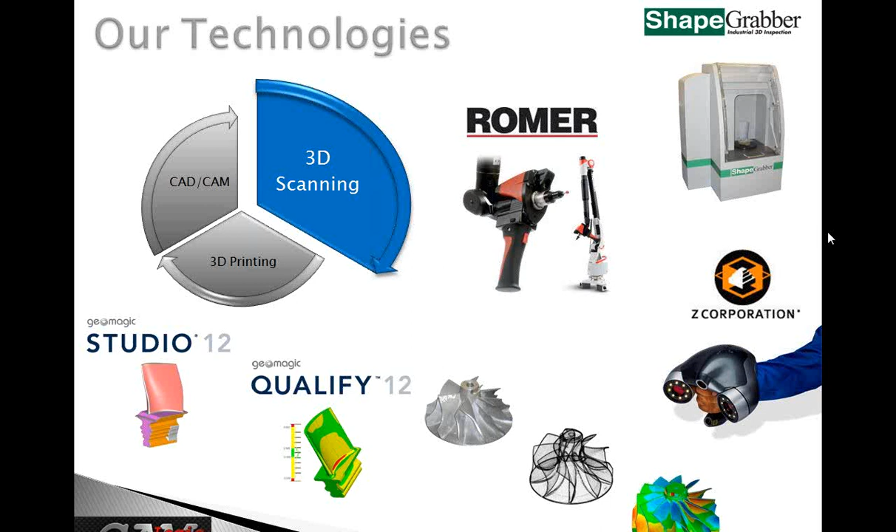So this week we're going to talk about Solid Edge surfacing, and again this is part 2. Just in general, Solid Edge surfacing is best used sketch based, so you're drawing profiles as to what you want. Free-form modeling. If you're going out there and you say, I need something that looks kind of, sort of, something like this, well, that's a good time to use surfacing.

Also non-planar, non-analytical. When you want to go out there and say, I've got this piece and it's going to twist and it's going to curve halfway around and then go straight and then go to a point, things like that, it's a great time to use surfacing. And then also to repair and enhance imported models.

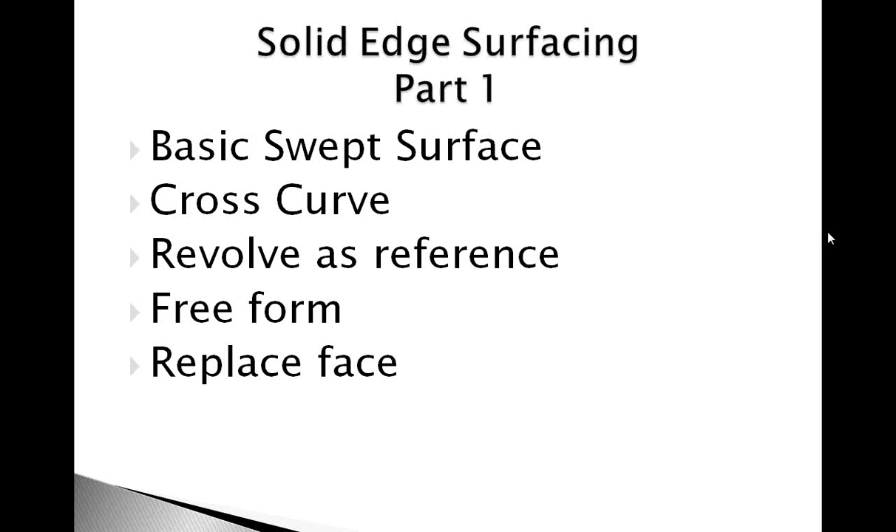Last time we talked about this, and this again is out on YouTube. We did a basic swept surface, cross curve, revolve as a reference. We did a tire. We were making a fender, so in order to see what size of fender I needed, I used surfacing to make a tire very quickly, just so we could work around that. Free form, and then replace face.

In this session, we're going to look at BlueSurf, bounded surface, wrap sketch, and project to sketch, or project sketch. So let's go ahead and start with our project sketch.

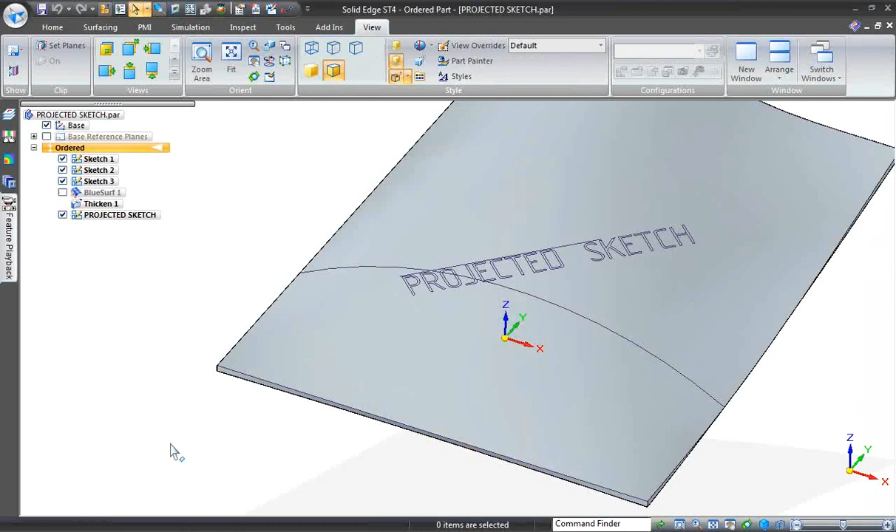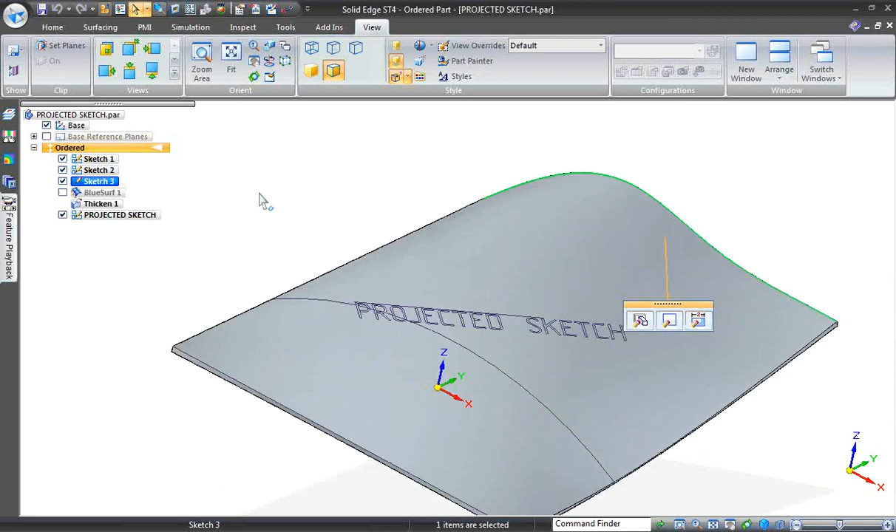I'm in my Solid Edge part, and I've got a fairly complex shape that I created, and it started from this straight sketch, went to the curve sketch, and then went to this free-form curve, if you will, and I used BlueSurf to tie that all the way in there. You can see that BlueSurf went across there.

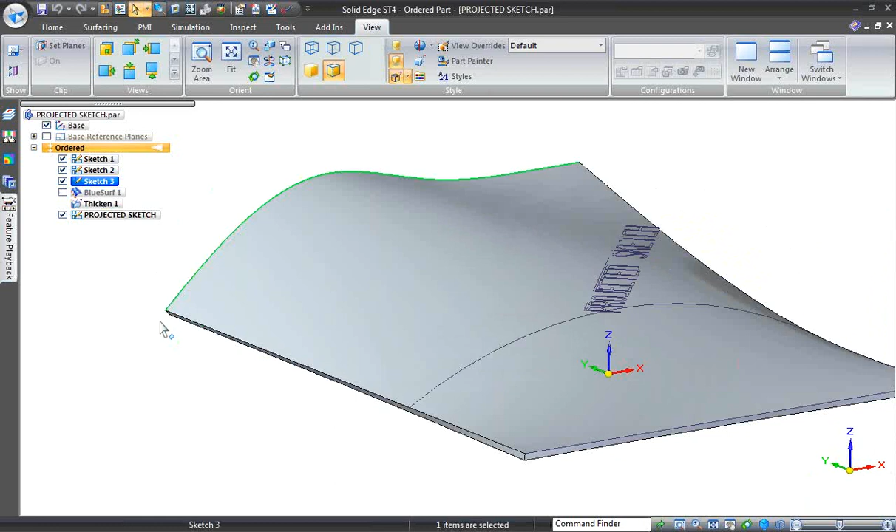Then I used a tool called thicken, and we'll see this later on, that allowed me to take that complex shape and give it an actual thickness, and then it became a part. So today we're going to learn about projected sketch. I want to take this projected sketch, and this sketch right out here is nothing more than some text. We'll come over here.

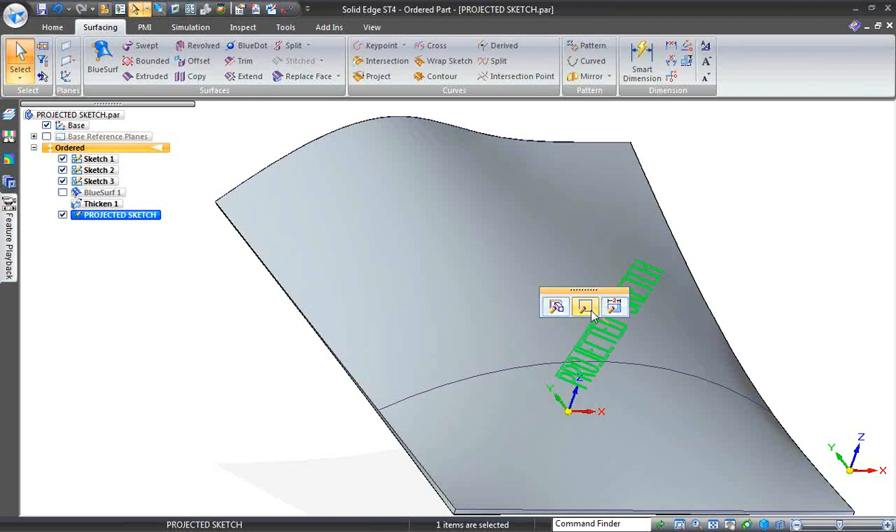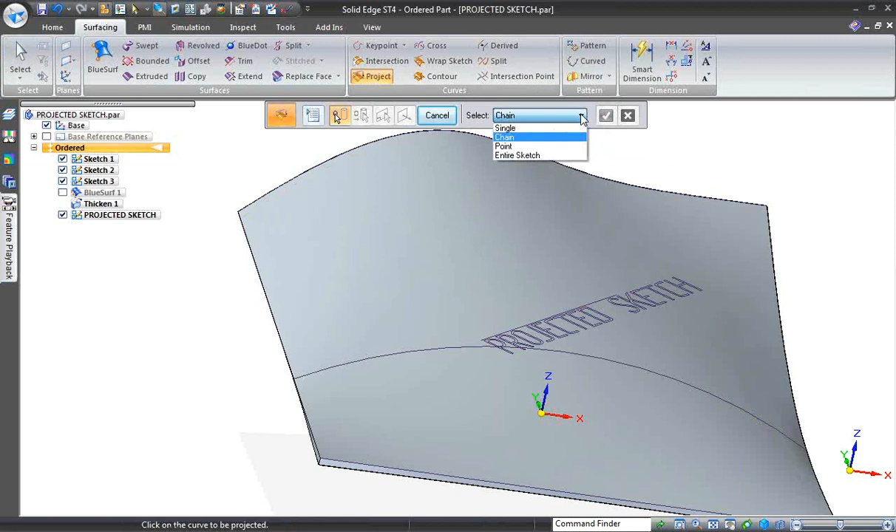This projected sketch is nothing more than a set of text called projected sketch. You can have anything that you like, but it's sitting out on a plane, on a regular flat plane. And I want to go ahead and use surfacing now to project that sketch. So the first thing I want to do is pick on the entire sketch there.

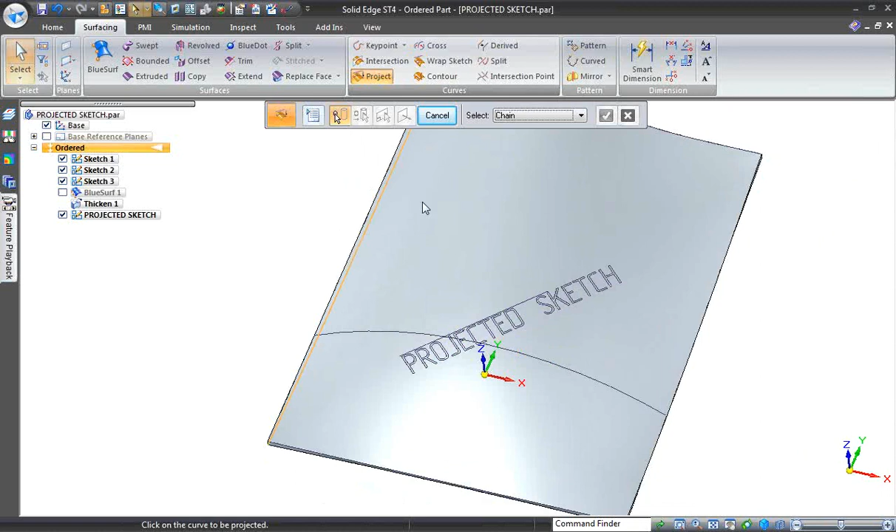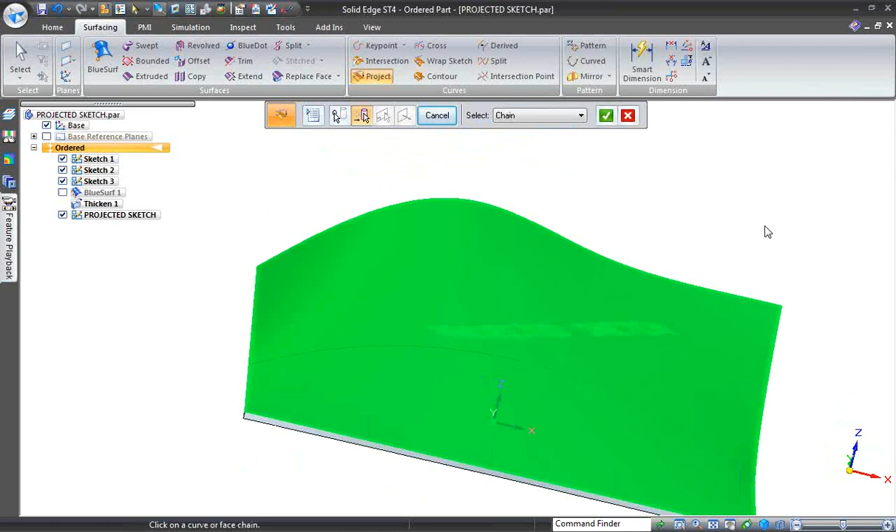I might just do it single. Bear with me 2 seconds here. So we'll go ahead and project that sketch, and just take it right like that. And I'm going to take out that line, I don't need that. And then I'm going to pick on the face that we're going to project to. And now I'm going to tell it to project down.

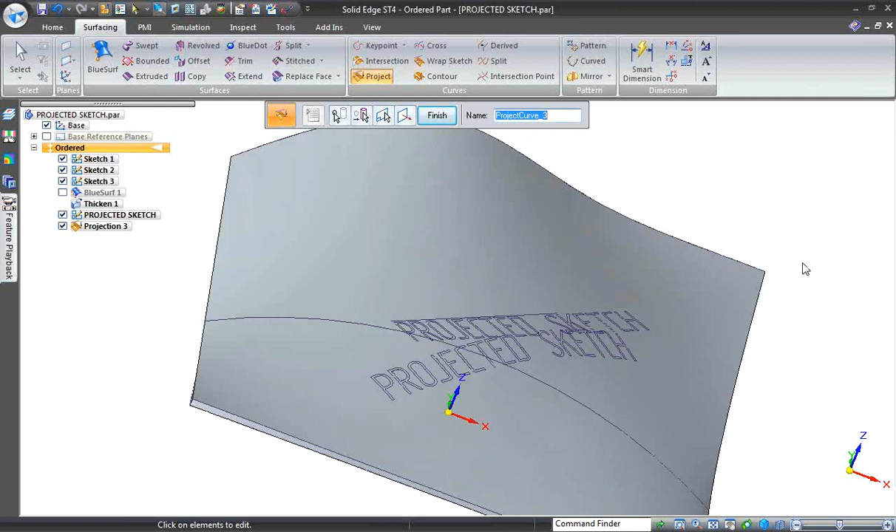So now I've got projected sketch. This, almost as if you will, this was on this sketch. The text right out here was on a piece of glass. And if you think about it, we shot a spotlight through there, and that shadow of that sketch went right down onto there. So we have our projected sketch,

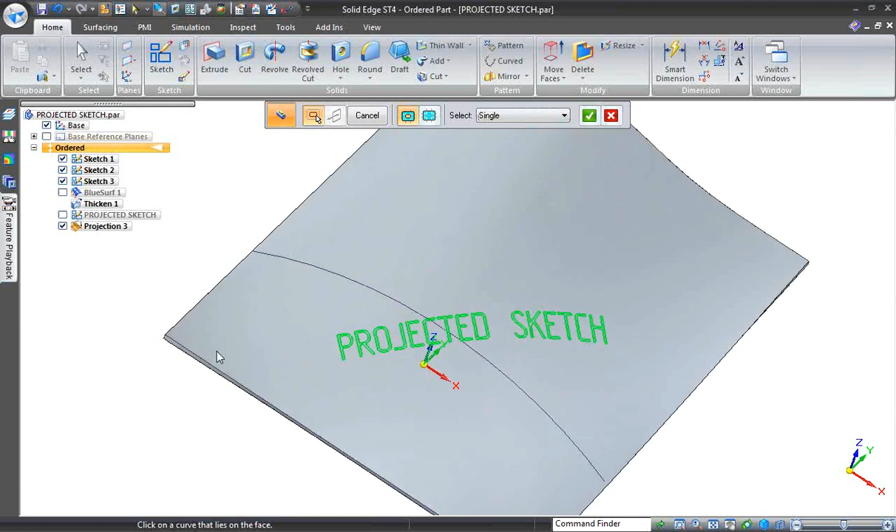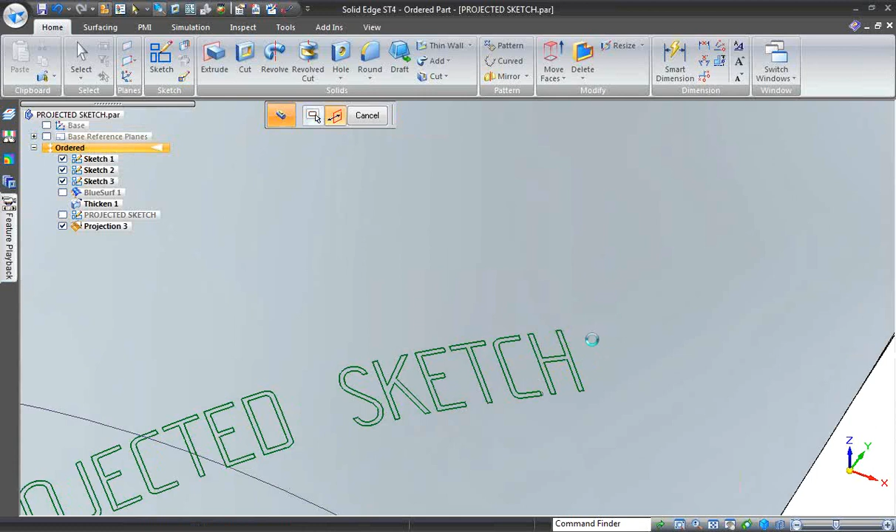and in this case, we'll go out and we'll add a normal protrusion, if you will, to this. Go in and then come up. In this case, we went up 20 thousandths.

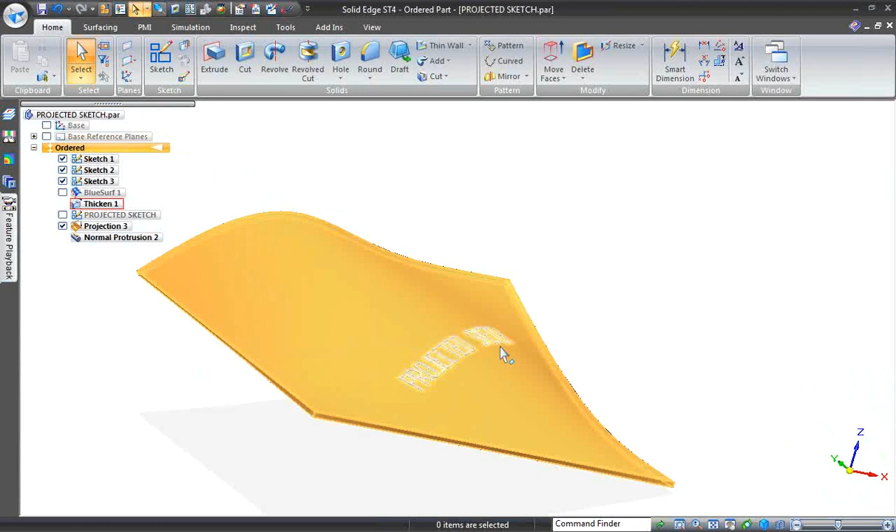Okay. So I've got a projected, roll over this way. I've got a projected sketch that I came from up top of a flat plane, shot it down, and projected it on there, and then now I can go ahead and bring that up. And that can be with text, that can be with bosses or bumps or holes or any offset that you want, or even cuts. Cuts can go through there and do the same thing. So that was a projected sketch.

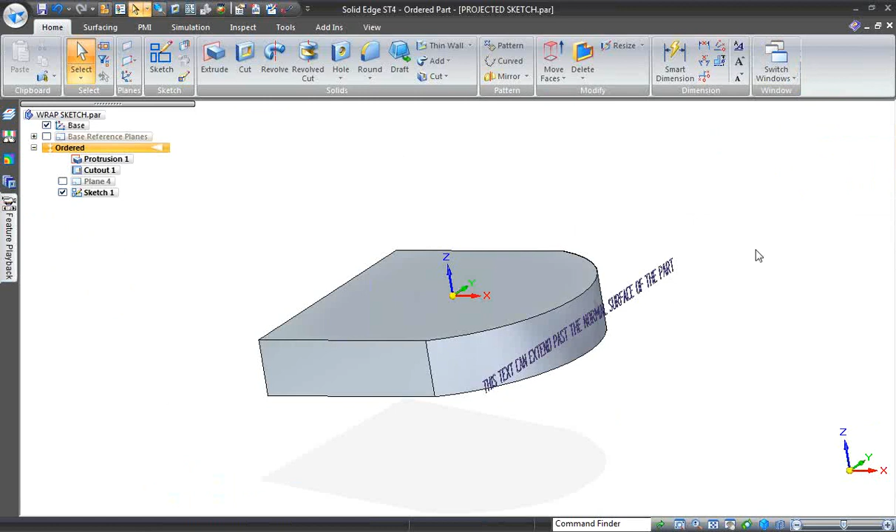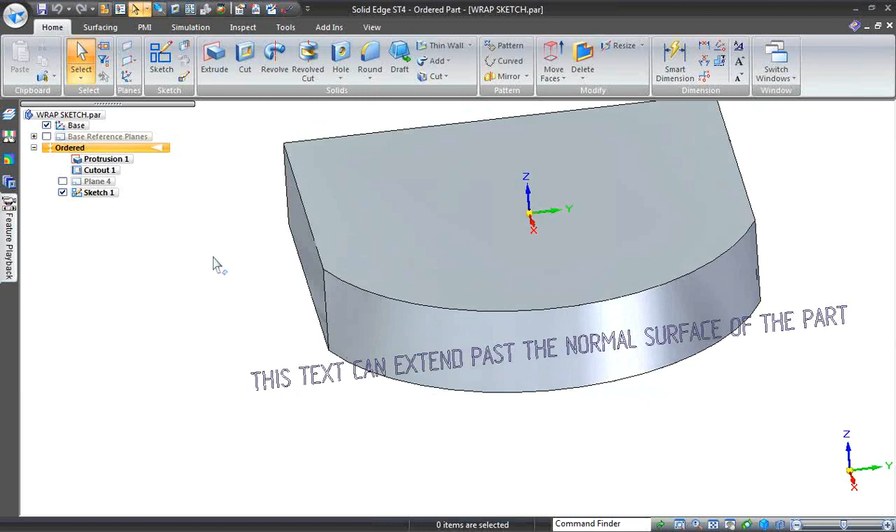Now I want to go over to a wrap sketch. A wrap sketch is just basically, think of a label. And as the part says, this text can extend past the normal surface of the part. So we're just laying this out, think of a piece of tape, think of a label that we would peel off and stick. And we'll just simply go to our surfacing at this point, and we'll just go ahead and wrap this sketch.

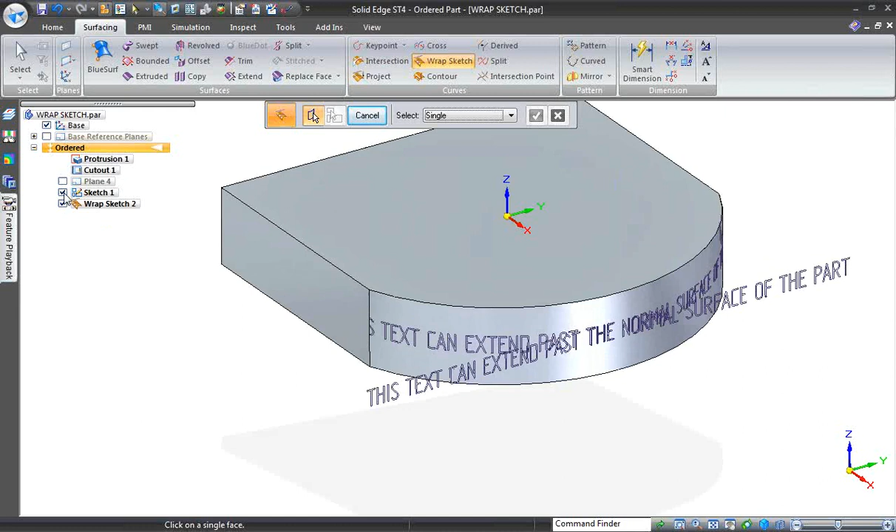And I'm going to take just this face right here, and then take and finish that. Okay? So now, again, we can cut, we can do anything that we like. I want to take that off, and you can see that it's just like a piece of tape. And you can see that this text does extend past the normal surface of that part.

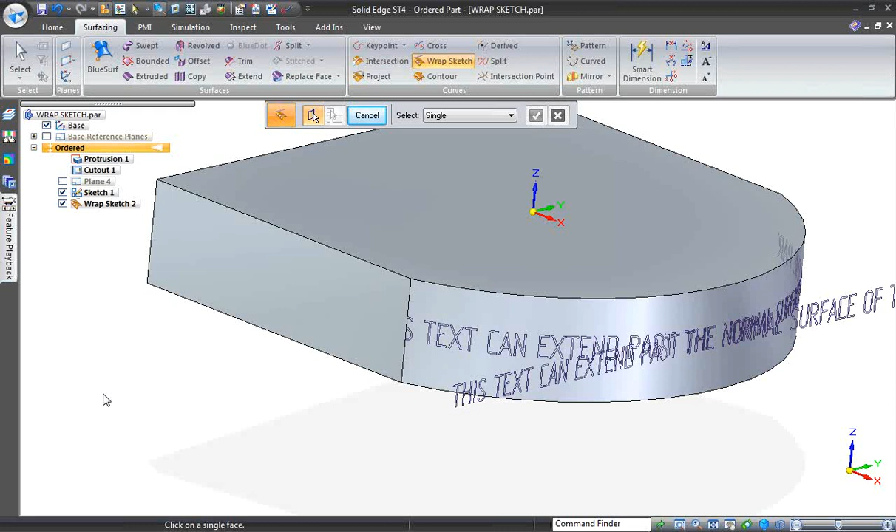So I can just make that label as big as I like, small as I like, and I'm just laying that around there. In this case, we would make the part wider to accommodate that whole label, if you will. But that is a wrap sketch. A wrap sketch is basically, if you think of a sticker or something like that, where you're taking a specified piece and wrapping it around the surface. And again, it can be bigger than the surface. It can do whatever we need it to be. But if you think of a label or a sticker, that's what a wrap sketch is.

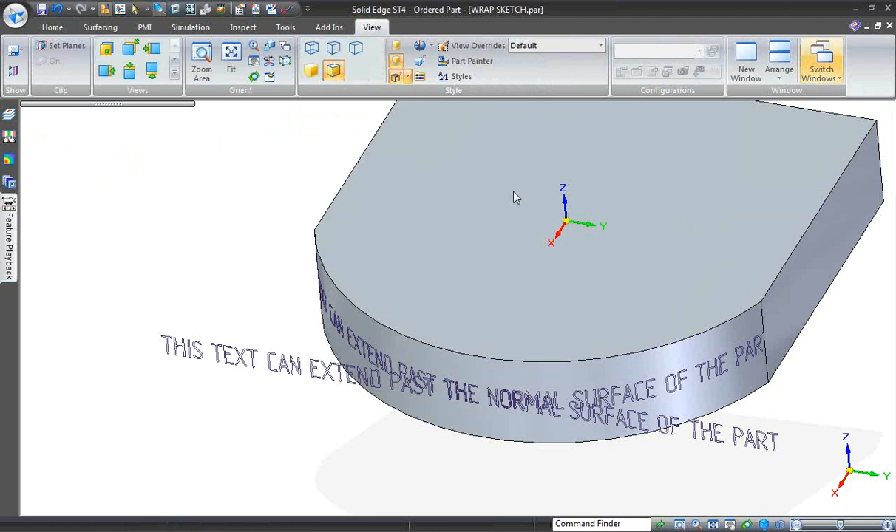So let's switch over to a bounded surface. Now, a bounded surface allows me to repair things that are missing. In this example, I'm going to go to my surface and I'm going to copy a surface. Now, when I copy a surface inside of surfacing, I can have the ability to remove internal boundaries. So let's say if I were to click on here and remove internal boundaries, it would

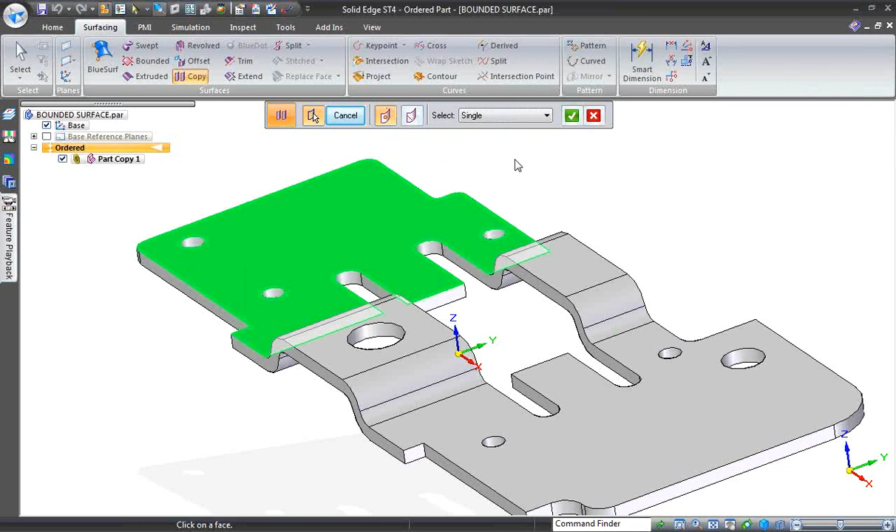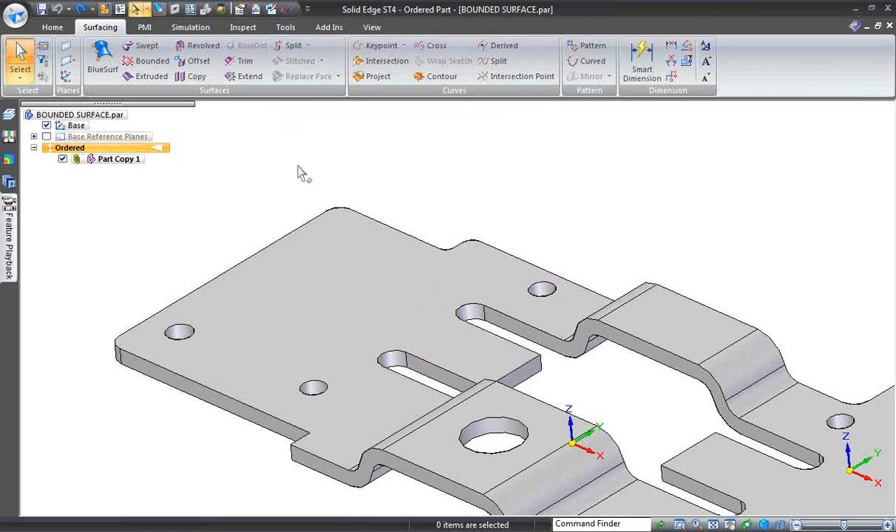automatically plug those holes. Die makers and tooling makers, you understand the power of that, because I want to make a tool that fits the surface of that, not necessarily fills in through the holes. So copy a surface is a very strong tool, but what I'm going to do in this case is I'm going to not fill in those internal boundaries.

I'm just going to keep the internal boundaries that I have. So for instance, I may want to make tooling that fills in everything but this one hole right here. So I'm going to go to bounded surface, and this is the same in repairing something. If you've got a bunch of sheets that are coming together and there's an extra tear or a shape that is missing right there, as long as that's closed in, I can go to bounded surface and just click and bound over that surface.

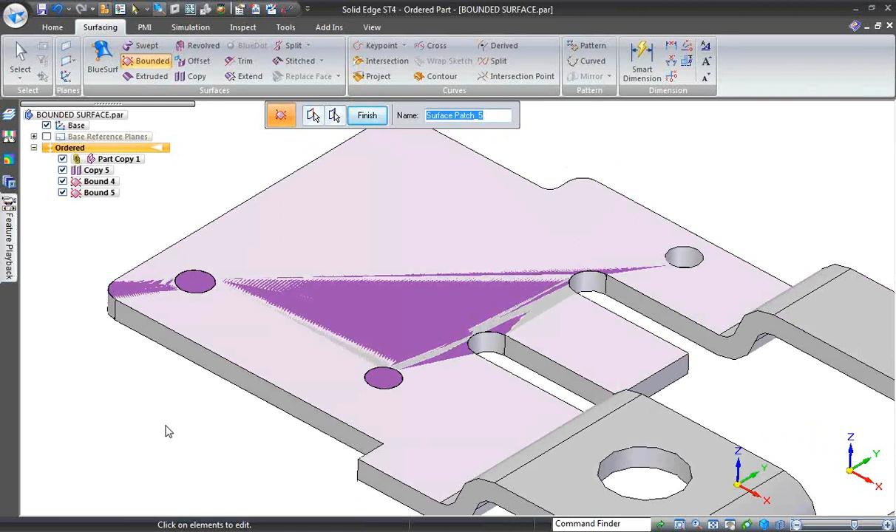I'll do it again. I'll take this one, and it's enclosed. Right click to accept, to preview, and then I can bound over that surface. So in other words, I'm taking all of this surface. I didn't want to close in all of the holes, so I chose not to close in those holes, but I have bounded in the surfaces that I want.

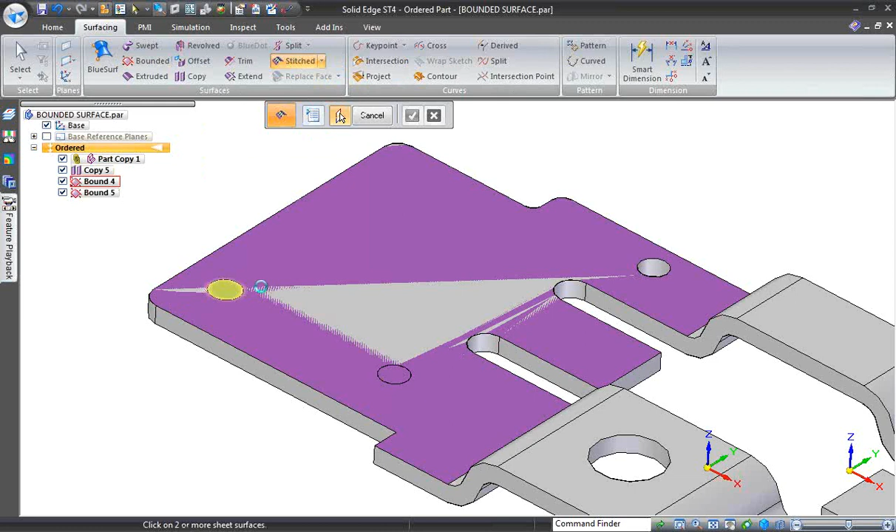Now, in this case, I can also go ahead and stitch the surfaces. So I can take these, these are now multiple surfaces, these three, and it will actually stitch that together as one unit. Okay, those are my choices, and that's bounded surface.

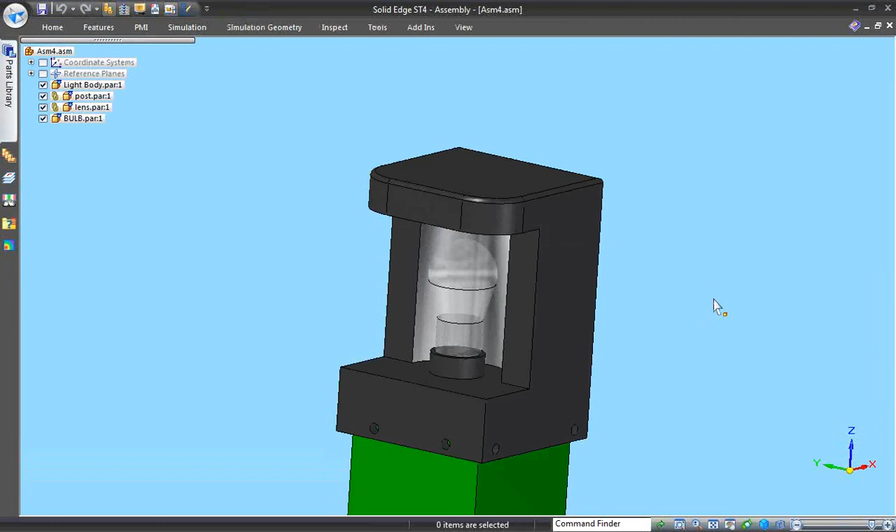Now, I want to switch over to probably the cool portion of this presentation, and that is a little bit of BlueSurf. And we'll even do some photo rendering at the end too, because I think this is cool. This is a light post that sits on top of a post, and it's a cap. We've got some screws over here. You can tell what kind of project I was thinking of when I wanted to build something like this.

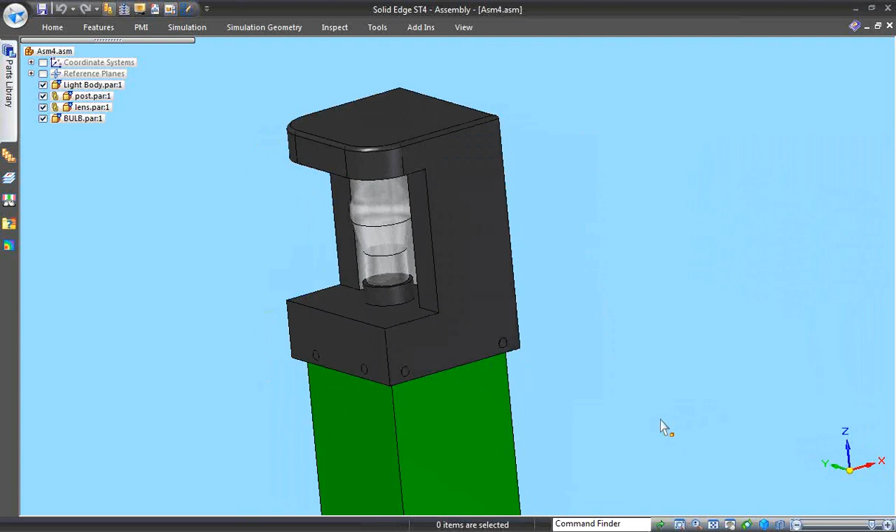So this just sits on top of a post, and here's the light and a light bulb, but we want to go make a shade for that. So I want to start over and start working in this part. Now, just for the sake of time, I've gone ahead and inserted that light unit as an inter-part copy, and I've also started one sketch down there at the bottom. Now, as we said, surfacing is sketch based, so I'm going to start a new sketch out here.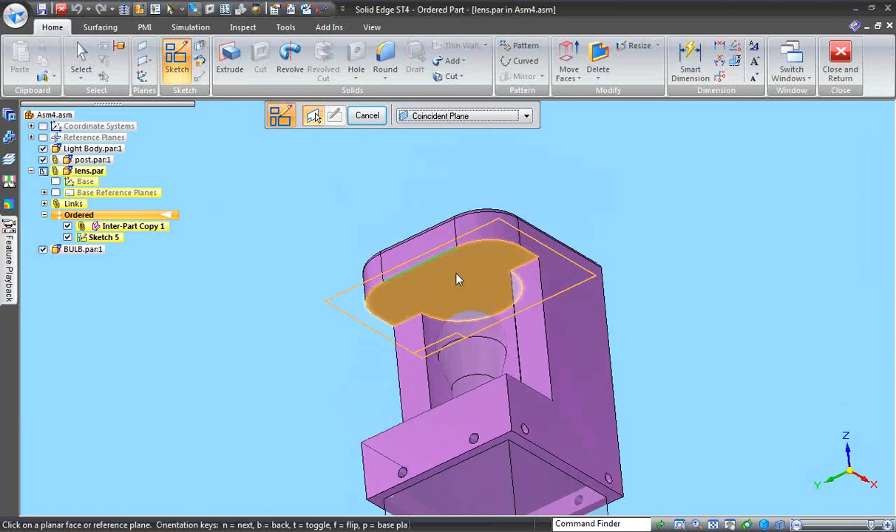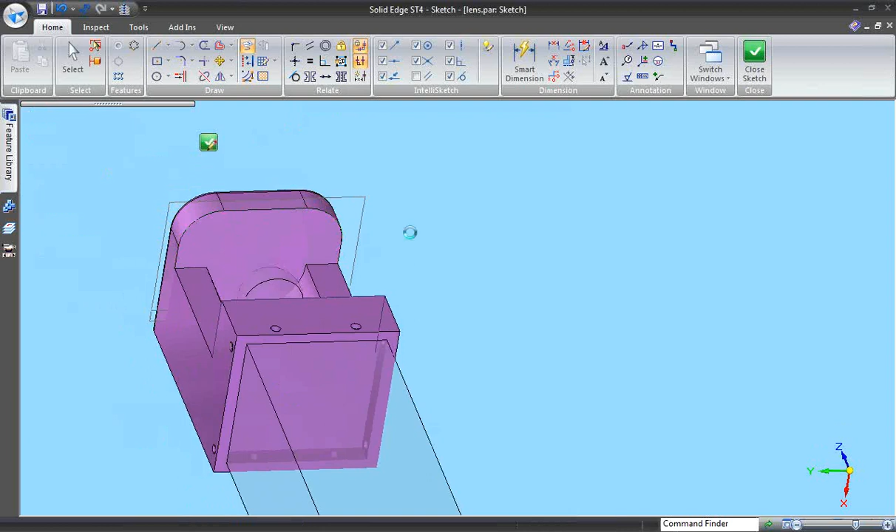And I'm just going to tip, and what I want is to include these edges. So in other words, I'm choosing a start and a stop point for my lens. So here would be my starting point. Here would be my stopping point up top where I wanted to go through.

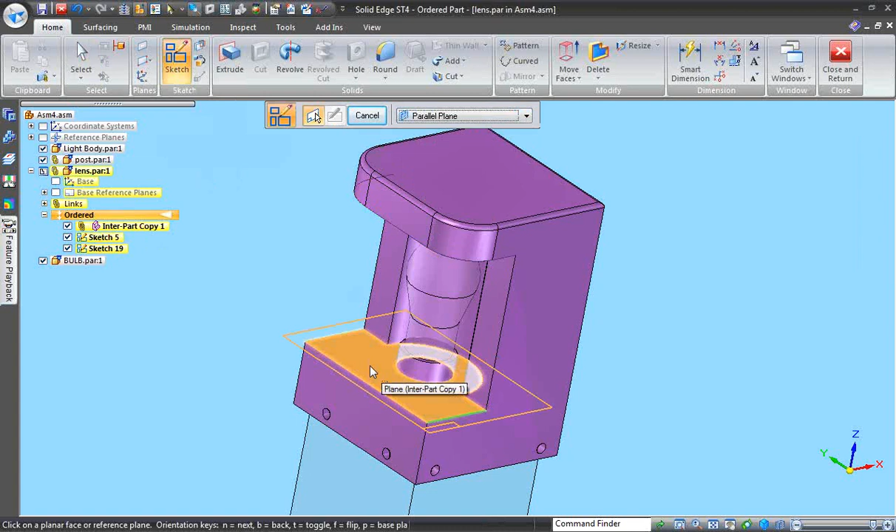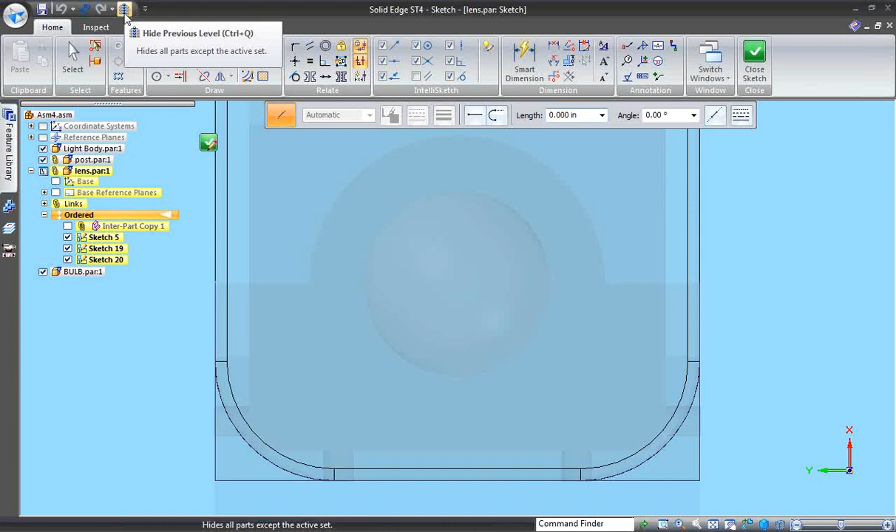Now the next thing I'm going to do is make a sketch out on a parallel plane. And we'll come around here. Just set this around. Now we'll come around here to the middle point of this opening. Now, at this point, I don't need to see anything else, because what I want to do here is go and create an arc by 3 points.

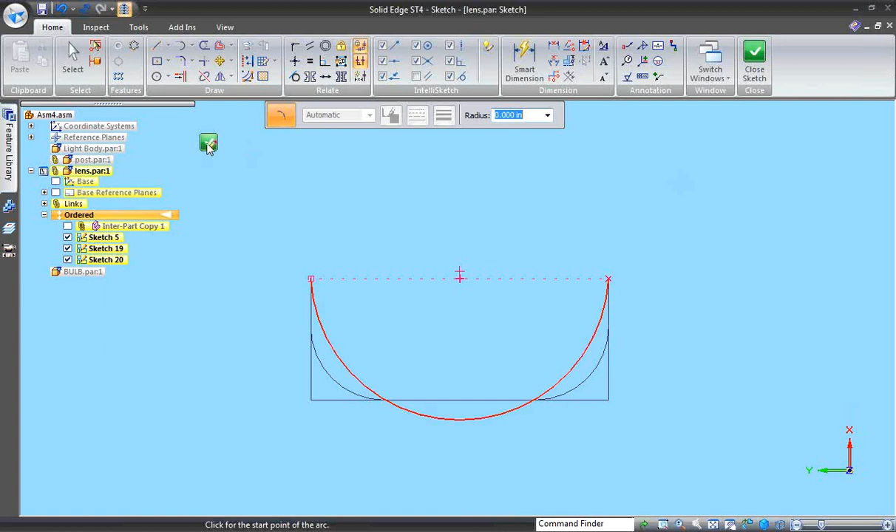And then really all I want to do is just say, yeah, we know the lens has to end back there, but we want to add a little bit of artistic flair to the part. So we want it to come square down at the bottom, round at the top, and then in the middle we want it to come out a little bit. So we want to get fancy, as it were, when we do this.

Now, to that, I'm going to add another sketch on a parallel plane. And I'm going to come from here, and I'll take it to the midpoint. Now, to there, what I'd like to do is create a curve. And a curve, you can think of it any way that you like. I like to think of it as a rubber band. You can stretch it, you can move it, you can do anything you like to it.

One of the nice things about this curve is that it does have specified points. So I can take these 2 points and I can make sure that the inside curve is going to be the same on both.

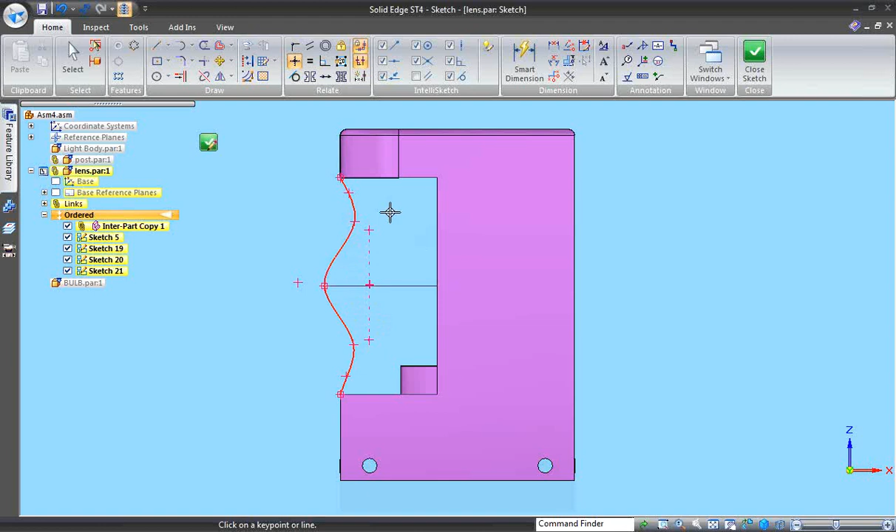So even though it's a freehand, free form type thing, I can add constraints, and I can also dimension as well. But I can add constraints, and I can work with that. So I have this. I really don't need anything else at this point to start my work. I don't need any other part. So I'm going to start with BlueSurf.

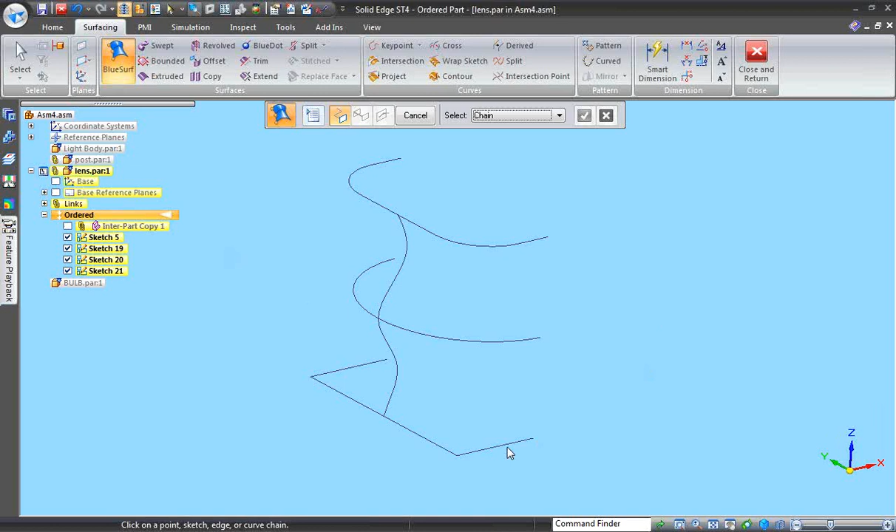Now, BlueSurf is much like taking saran wrap, cellophane, if you will, and just stretching it over certain areas. So I'm going to take and go from one area to another, and Solid Edge is just going to shoot this very, very fine, very, very thin piece of material, surface, right over there.

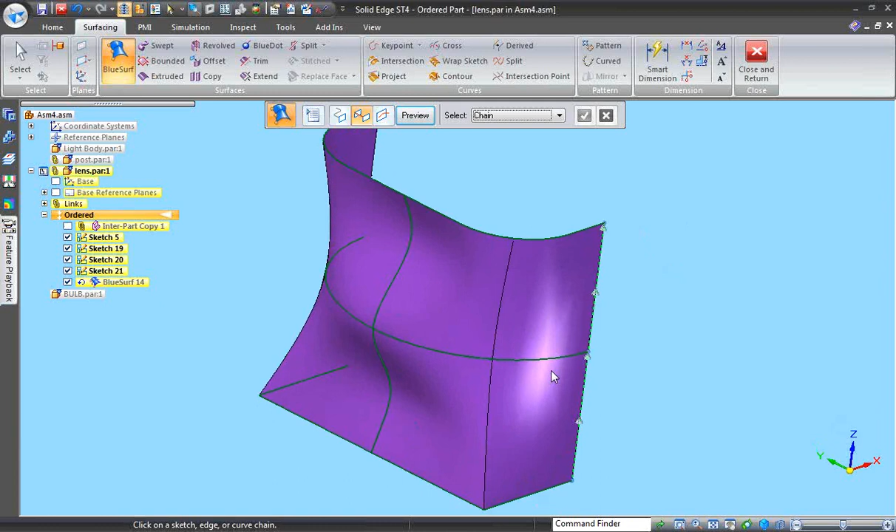So I've got my part, but right now it's going from cross-section to cross-section to cross-section. And that's fine, but what I want to do is insert a guide curve, and I want to follow that guide curve. And if you'll see, it'll actually bow in and follow this guide curve now. So it is going from cross-section to cross-section to cross-section, but it is also following this curve that I have set up over here. So have something like that.

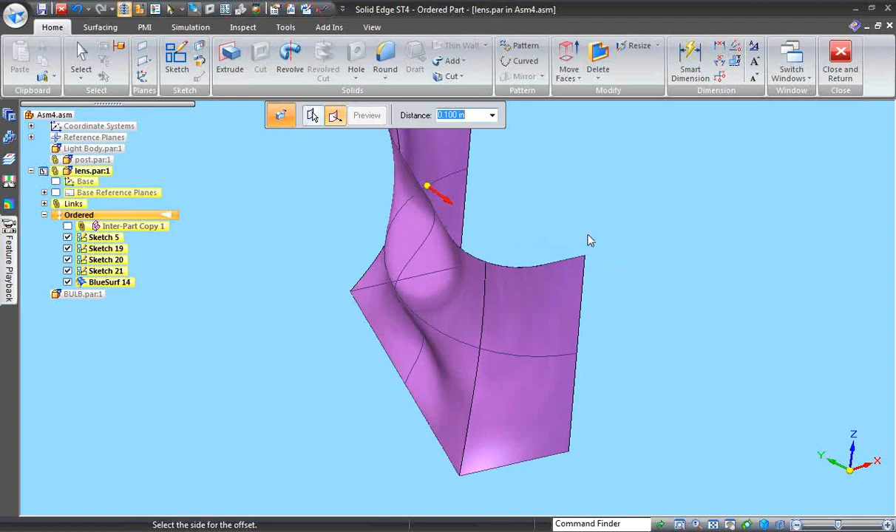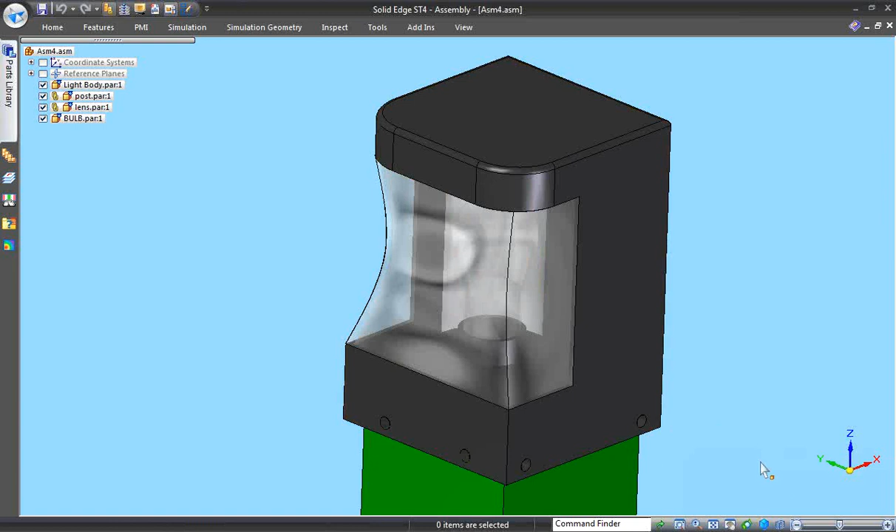I'll go out and I will add and I will thicken, and I've already set this to a certain thickness, and I've already given it a material just for the sake of time, and this piece is glass. So again, this is going to be used out in my light box. So you can see that I have my bulb, I have my light shade there coming out very, very nice. We'll just finish this off because it's such a nice little piece that we worked with.

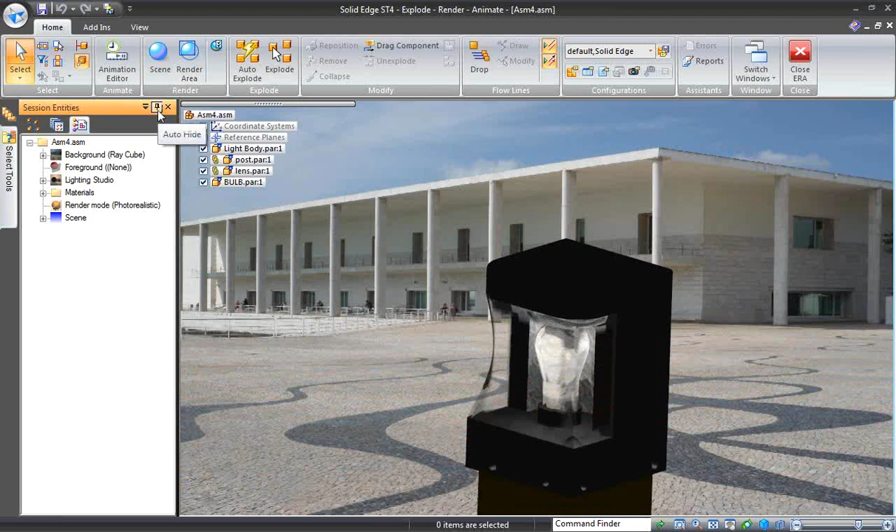I'm going to go out to my ERA, and I've already done this, but we'll go ahead and just run the scene and let you see what this part can actually look like. So if you're doing customer parts, if you're doing consumer parts, things where the looks are important, don't be afraid to use surface. Don't be afraid to make that a better model than the next guy is making.

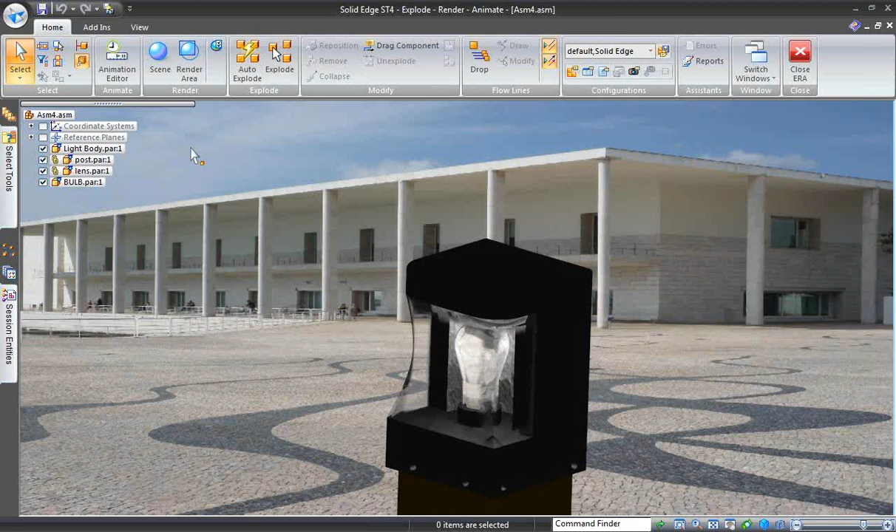Don't be afraid to say, I want this part to go from here to here to here, from cross-section to cross-section to cross-section. Don't be afraid for it to do that. And then when you have that, you can have a much better looking part than, say, the next guy that just makes it flat or straight or round. So again, the surfacing is a full complement of tools.

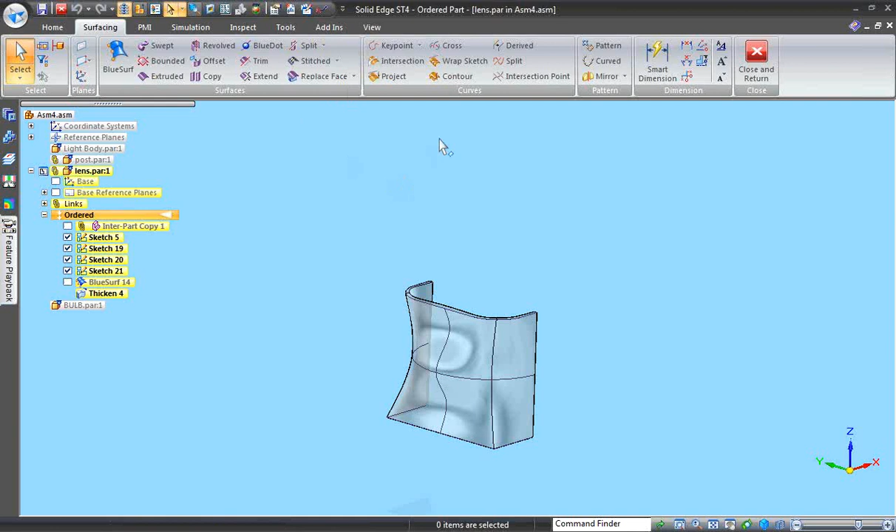We also teach in the classes swept, bounded, extrude, revolve, offset, copy, glue, trim, extend, split, stitch, replace. Under all of those, we've got some other tools. So it is a full complement of tools. So today, very quickly, we looked at BlueSurf, bounded surf, wrap sketch, and project sketch.